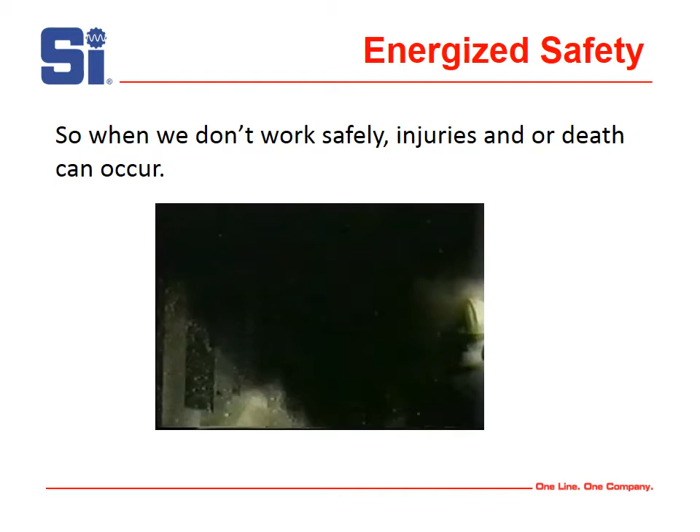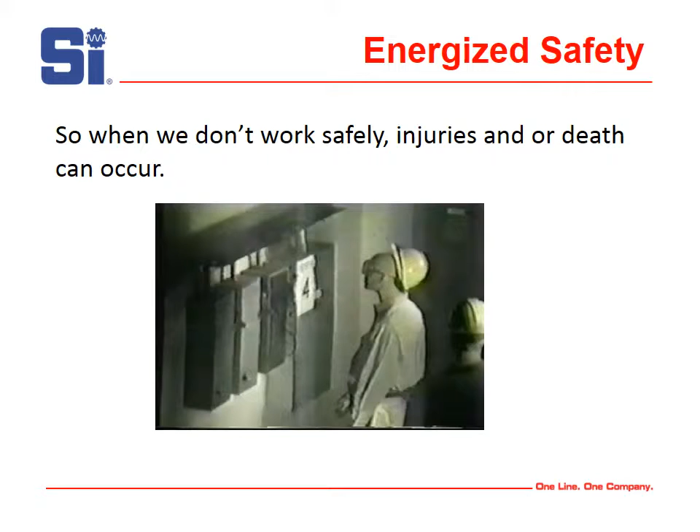Combustibles. In order for a fire or combustion to be present, you need a few things. You need a source for it to occur from, and you need a resource or chemical reaction to feed it. When these two things are present, you have the potential for devastation.

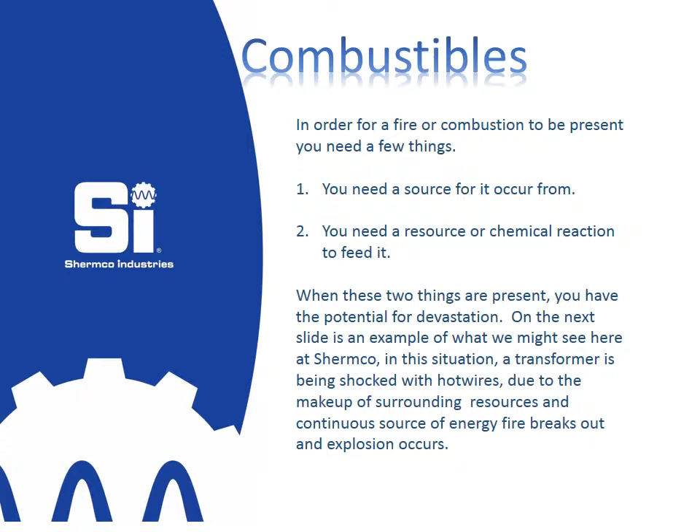On the next slide is an example of what we might see here at Shermco. In this situation, a transformer is being shocked with hot wires. Due to the makeup of surrounding resources and continuous source of energy, fire breaks out and an explosion occurs.

Combustibles continued. Here at Shermco, we have many ways that a fire can ignite from combustible means. Via OSHA regulations and constant updates to the MSDS, we can control substances and situations. The use of regulatory standards for use and storage of chemicals in the workplace is vital in our role of safety, as there are many different types of both flammable gases and chemicals on site.

Most common on site are flammable gases, such as oxygen, acetylene, and propane. Reactive ignition points also occur with welding, which uses electrical arcing to fuse metal.

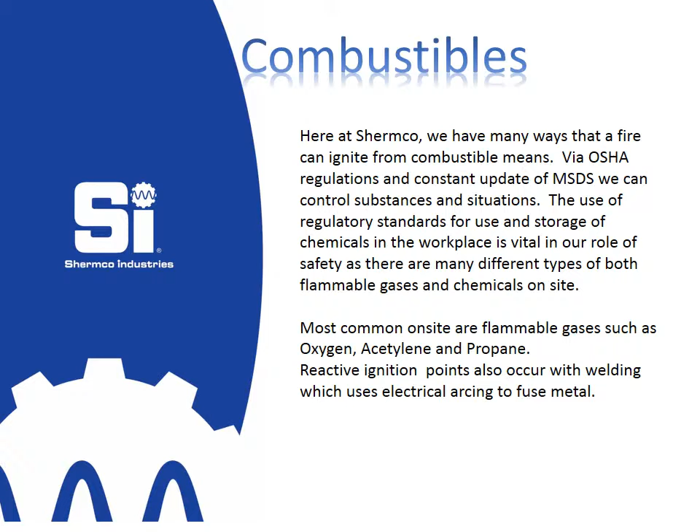Acetylene is a chemical compound with the formula C2H2. It is a hydrocarbon and the simplest alkyne. This colorless gas is widely used as a fuel and a chemical building block. It is unstable in pure form, and thus it is usually handled as a solution.

Propane is a 3-carbon alkane with molecular formula C3H8, a gas at standard temperature and pressure but compressible to a transportable liquid. Oxygen is a chemical element with the symbol O, atomic number 8. It is a member of the chalcogen group on the periodic table and is a highly reactive non-metallic element and oxidizing agent that readily forms compounds with most elements.

Welding is a fabrication or sculptural process that joins materials, usually metals or thermoplastics, by causing fusion, which is distinct from lower temperature metal joining techniques such as brazing or soldering, which do not melt the base metal. In addition to melting the base metal, a filler material is often added to the joint to form a pool of molten material, called the weld pool, that cools to form a joint that can be as strong as the base material. Pressure may also be used in conjunction with heat, or by itself, to produce a weld.

Many different energy sources can be used for welding, including gas flame, electric arc, laser, electron beam, friction, and ultrasound. While often an industrial process, welding may be performed in many different environments, including in open air, underwater, and in outer space. Welding is a hazardous undertaking, and precautions are required to avoid burns, electric shock, vision damage, inhalation of poisonous gases and fumes, and exposure to intense ultraviolet radiation.

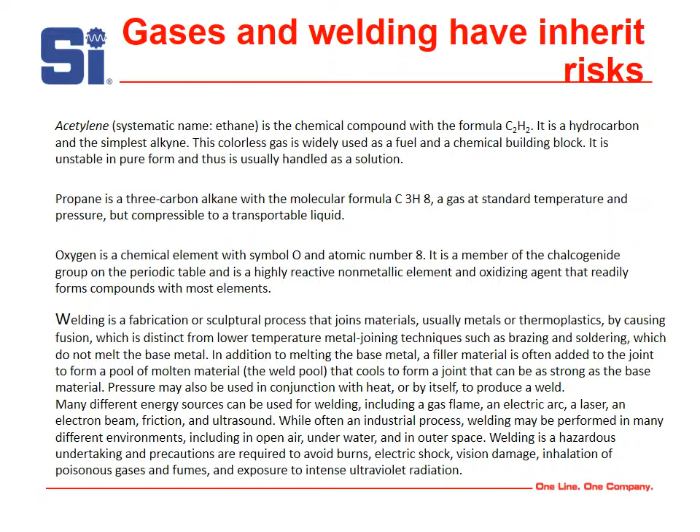Gases are regulated heavily by OSHA and covered under 1910.253(a), under the general requirements. Under A1, flammable mixtures, which is a mixture of fuel gases and air or oxygen, may be explosive and shall be guarded against. No device or attachment facilitating or permitting mixture of air or oxygen with flammable gases prior to consumption, except at the burner or in a standard torch, shall be allowed unless approved for the purpose.

Here at Shermco, we store our containers specifically to fall within the codes of OSHA Regulation 1910.253(b)(5)(ii)(a), and visibly distinguish them by color. The cylinders are always secured in upright position with a chain to eliminate accidental tipping, which might cause a break in the valve or a puncture, resulting in what could be listed as a catastrophic event.

Before a chemical, including gas, enters the facility, is used, or exits the facility, it is identified, labeled, and must pass a pre-task safety check sheet and be placed in storage, which is that of double containment. Acquisition of new chemicals and gases must be done through a formal request sheet and must be accompanied by a chain of custody log, with each owner identifying hazards found through their audits prior to its acceptance into the facility.

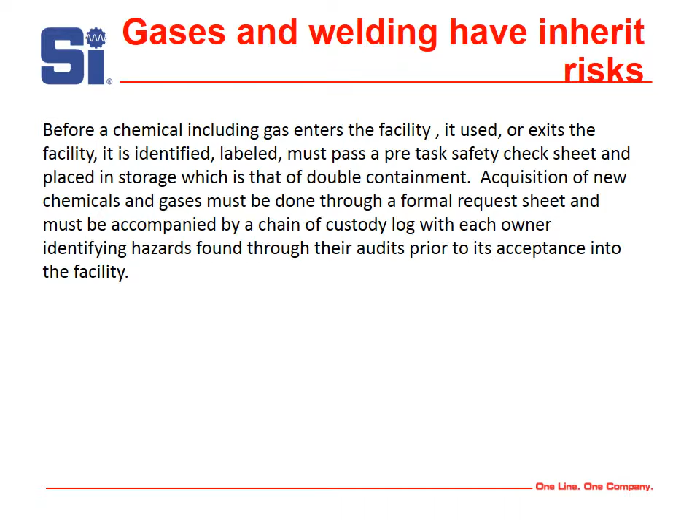Protection: there is designated PPE throughout the facility, including that which is properly fit-tested and designed for the individual using it. This protection is to ensure that safe constraints are placed on protection of eyes, hands, arms, legs, feet, body, and head.

In the event of an emergency, the company has a sprinkler system as well as fire doors to assist in containment areas. Fire extinguishers, which are also audited monthly for charge and serviceability, are available and designated for the appropriate fire in which they were manufactured.

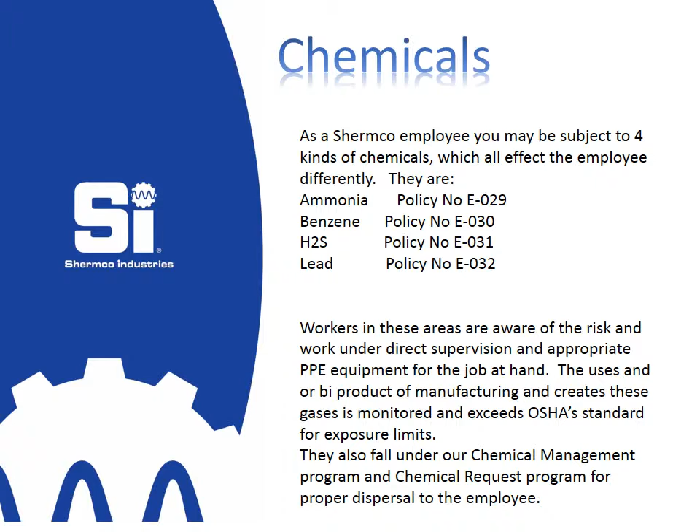Shermco's EHS policy manual conveys the necessary need and means of protecting against ammonia as part of the overall job hazard analysis. Policy: all employees who have been identified as having a predetermined risk of occupational exposure to ammonia will be provided appropriate procedural precautions, training, and PPE. The purpose is to protect employees from occupational exposure to ammonia, and the scope applies to all Shermco facilities and work sites.

Color and state: ammonia is a non-flammable, colorless gas under normal conditions. It can be liquid under pressure. It is very soluble in water, forming ammonium hydroxide.

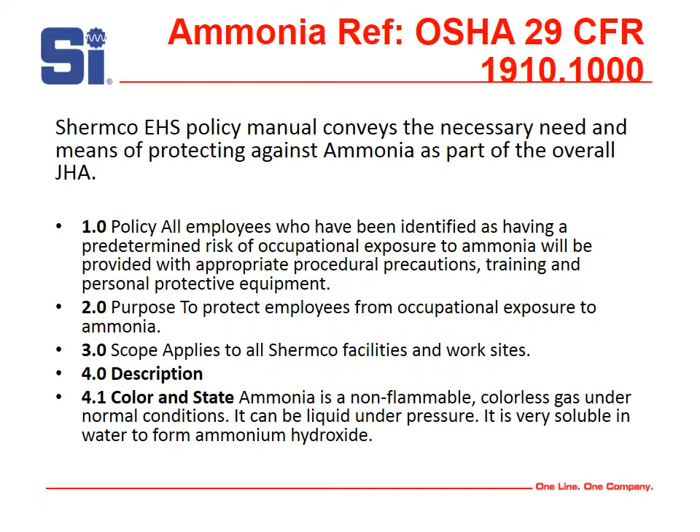Some clients at Shermco may use or produce ammonia during their operations. It is a component of products derived from coal and petroleum and is found in gasoline and other fuels. Most produced ammonia is used as a fertilizer, but anhydrous ammonia is widely used in industrial refrigeration applications and hockey rinks. Ammonia is also used in the manufacture of plastics, detergents, pesticides, and other chemicals.

Employee exposure could occur anywhere ammonia is produced or used. Ammonia is a hazardous gas that is both caustic and toxic. High concentrations of ammonia gas, liquid ammonia, or solutions of ammonia can cause harm if inhaled or if they come into contact with eyes or skin. Ammonia also has a very pungent, suffocating odor. Even at low concentrations, inhaling it or getting the solution on the skin can cause burning, fainting, or possible death. Caution should be used when handling this chemical.

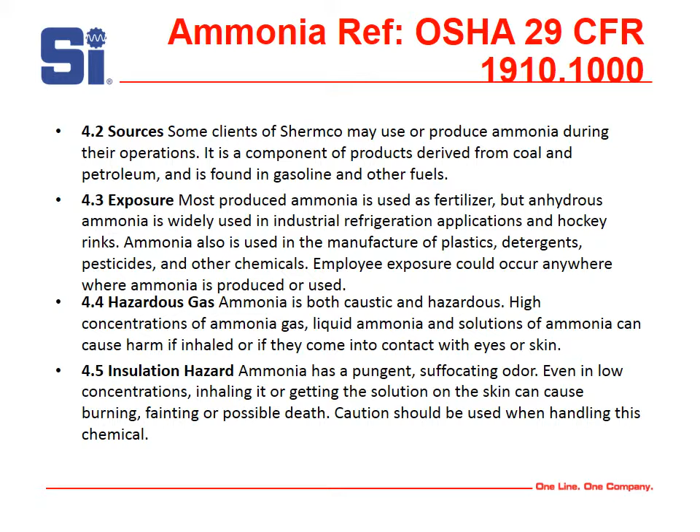High concentrations of ammonia gas, liquid ammonia, or solutions of ammonia can cause harm if inhaled or if they come into contact with eyes or skin. The Occupational Safety and Health Administration has set a 15-minute exposure limit for gaseous ammonia of 35 parts per million by volume in environmental air, and an 8-hour exposure limit of 25 parts per million by volume. The National Institute for Occupational Safety and Health recently reduced the IDLH, or immediately dangerous to life and health level, from 500 ammonia parts per million to 300 parts per million. OSHA Regulation 1910.134(b) defines IDLH as an atmosphere that poses an immediate threat to life, which would cause irreversible adverse health effects, or would impair an individual's ability to escape from a dangerous atmosphere.

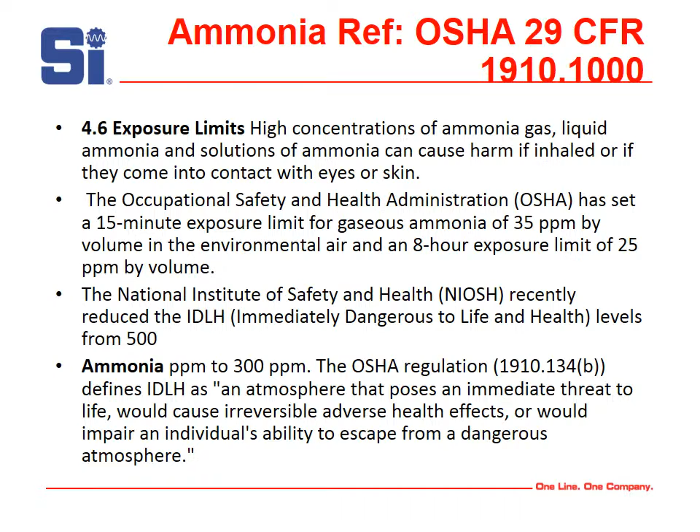Ammonia vapor has a sharp, irritating, pungent odor that acts as a warning of potentially dangerous exposure. The average odor threshold is 5 parts per million, well below the level of danger or damage. Exposure of the eyes to ammonia may cause burning, tearing, temporary blindness, or severe eye damage. Exposure of the skin to ammonia may cause severe burns and blistering. Exposure of the respiratory tract, mouth, nose, and throat to ammonia may cause runny nose, coughing, chest pain, severe breathing difficulties, severe burns, and even death.

Training: although ammonia is regulated in the United States as a non-flammable gas, it still meets the definition of a material that is toxic by inhalation. Shermco employees who work in the vicinity of ammonia will be trained to avoid exposure to the chemical. This training will include, but is not limited to, the contents of this policy, the federal OSHA standards and guidelines, proper PPE selection and use, care and inspection, and customer-required precautions related to working around ammonia.

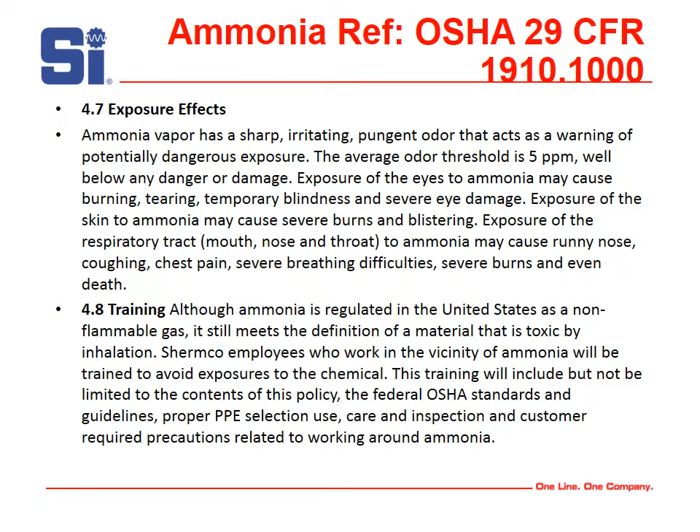Shermco employees will be provided with and required to use impervious clothing, gloves, face shields, respirators, and other appropriate protective clothing necessary to prevent any possibility of skin contact with liquid anhydrous ammonia or aqueous solutions of ammonia containing more than 10% by weight of ammonia. Similar precautions should be taken to prevent the skin from becoming frozen from contact with vessels containing liquid anhydrous ammonia.

Employees will utilize the job hazard analysis to indicate the hazard of ammonia in their vicinity and to outline any safety contingency plans and provisions to be followed. Site plan awareness: employees must be informed where ammonia is used in the host facility and be aware of all plant safety rules and emergency contingency plans that apply. Crew leaders are responsible for obtaining this information prior to work commencing and for communicating it to the crew during the morning tailgate meeting.

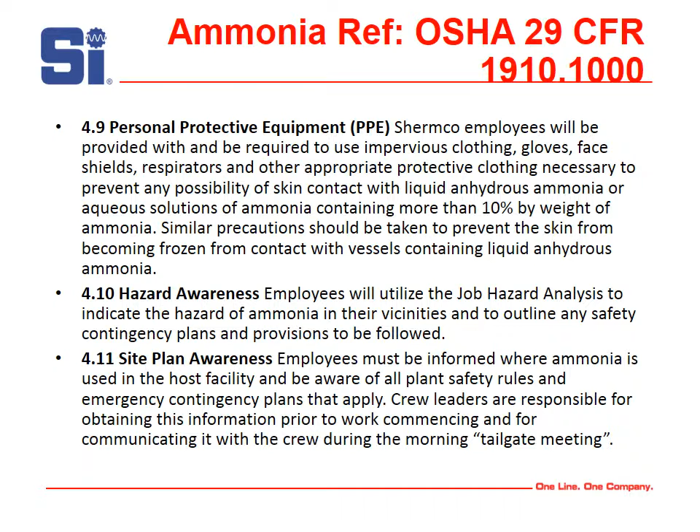Benzene. All employees who have been identified as having a predetermined risk of occupational exposure to benzene will be provided with appropriate procedural precautions, training, and personal protective equipment. Purpose is to protect employees from occupational exposure to benzene. This applies to all Shermco facilities and work sites.

Benzene is a colorless liquid with a sweet odor. It evaporates into the air quickly and dissolves slightly in water. It is highly flammable and is formed from both natural processes and human activities.

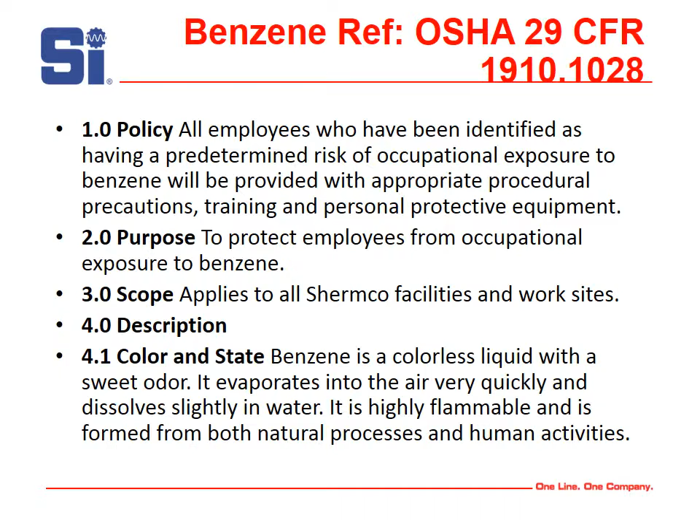Some clients at Shermco may use or produce benzene during their operations. It is a component of products derived from coal and petroleum and is found in gasoline and other fuels.

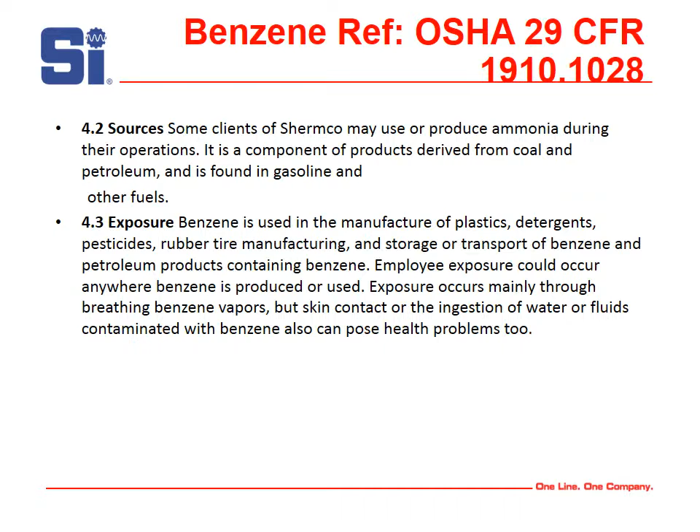Benzene is used in the manufacture of plastics, detergents, pesticides, rubber, tire manufacturing, and storage or transport of benzene and petroleum products containing benzene. Employee exposure could occur anywhere benzene is produced or used. Exposure occurs mainly through breathing benzene vapors, but skin contact or the ingestion of water or fluids contaminated with benzene also can pose health problems.

Controls. Before an employee may go to a job where they may be exposed to benzene, a schedule for development and implementation of the engineering and work practice controls will be established. Exposure to benzene is controlled by limiting evaporation and preventing splashes and spills. Where exposure may occur, the preferred controls are engineering controls such as the use of hoods, canopies, and proper ventilation, coordinated with the use of personal protective equipment.

A time period will be allowed for such engineering controls to be implemented before personnel are permitted to work in the vicinity. When engineering controls or work practices are being implemented and are not feasible, or in the event of emergency, respirators and similar personal protective equipment may be used. These plans will be reviewed and revised as appropriate based on the most recent exposure monitoring data to reflect the current status of the program as it pertains.

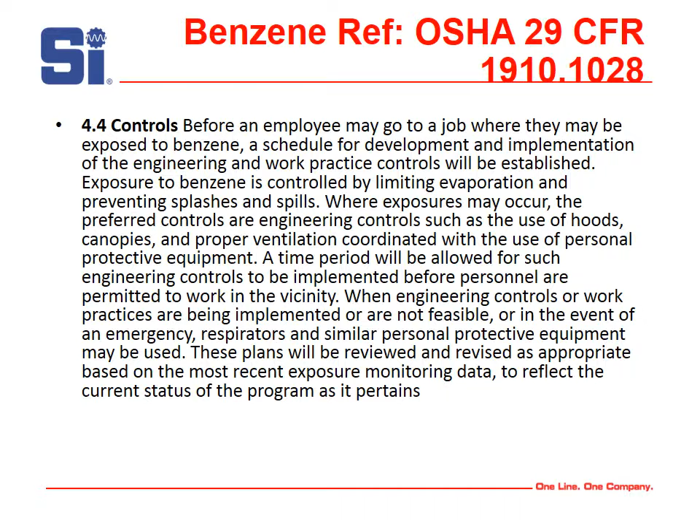Hazardous chemical. Benzene is considered a carcinogen by the U.S. Department of Health and Human Services.

Exposure limit. The Occupational Safety and Health Administration has set a 15-minute exposure limit for benzene of 1 part of benzene per million parts of air, that's 1 parts per million, as an 8-hour time-weighted average, or the short-term exposure limit of 5 parts per million for 15 minutes.

The National Institute of Safety and Health recently reduced the IDLH levels to 500 parts per million. The OSHA Regulation 1910.134(b) defines IDLH as an atmosphere that poses an immediate threat to life, would cause irreversible adverse health effects, or would impair an individual's ability to escape from a dangerous atmosphere.

When exposures are expected to be over the PEL prior to mobilizing to the work area or site, Shermco will implement our written program to reduce or eliminate employee exposure to or below the PEL by means of engineering and work practice controls.

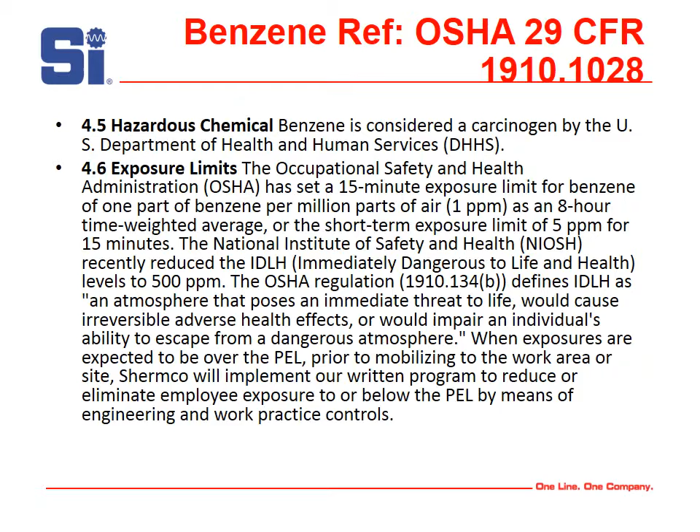Exposure effects. With exposure to benzene for less than 5 years to more than 30 years, individuals have developed and died from leukemia. Long-term exposure may affect bone marrow and blood production. Short-term exposure to high levels of benzene can cause drowsiness, dizziness, unconsciousness, and even death.

Training. Shermco employees who work in the vicinity of benzene will be provided with a written copy of this plan and trained to avoid exposure to this chemical. This training will include, but not be limited to, the contents of this policy and federal OSHA standards and guidelines, proper PPE selection and use, care and inspection, and customer required precautions related to working around benzene.

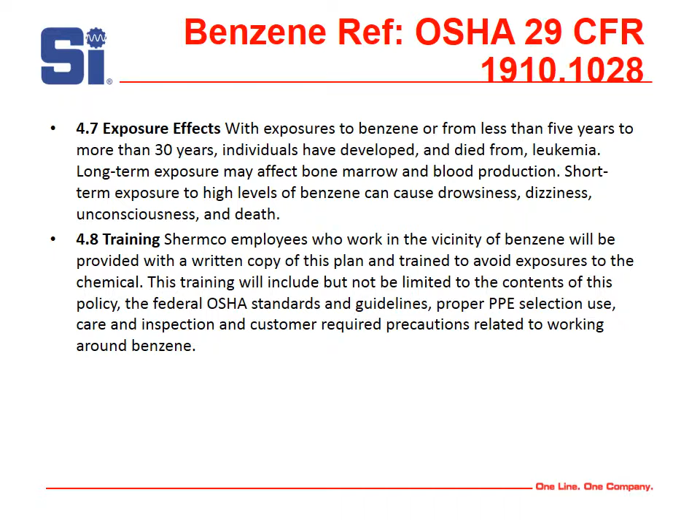Personal protective equipment. Shermco employees will be provided and required to use appropriate respirators based upon the expected airborne concentrations of benzene and/or conditions of use. Respirator use will adhere to the Respiratory Protection Policy Section E-038 in the Shermco EHS Manual, which adheres to OSHA 29 CFR 1910.134. All respirators utilized for benzene protection will be NIOSH approved.

Where respiratory protection is not required but benzene exposure could occur due to accidental release, an organic vapor gas mask or a self-contained breathing apparatus with a full face piece will be provided for use during escape. Personal protective clothing and equipment, i.e. chemical goggles, poly-coated Tyvek suits, etc., will be worn where appropriate to prevent eye contact and limit dermal exposure to liquid benzene. Protective clothing and equipment will be provided by Shermco at no cost to the employee.

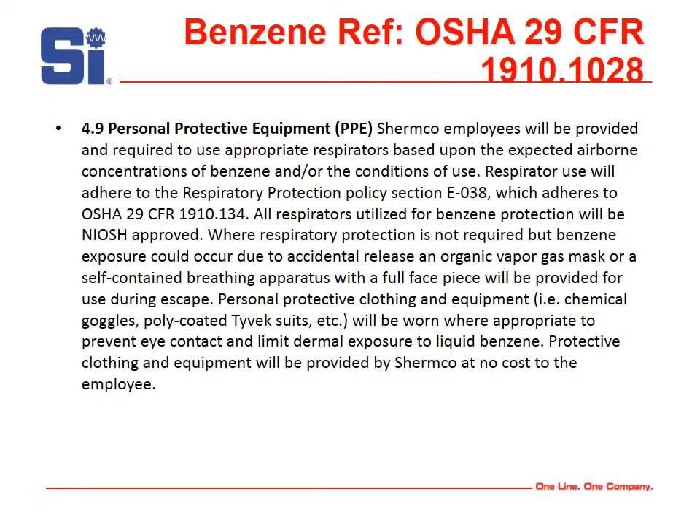Hazard awareness. Employees will utilize job hazard analysis to indicate the hazard of benzene in their vicinities and to outline any safety contingency plans and provisions to be followed.

Site plan awareness. Employees must be informed where benzene is used in the host facility and be aware of all plant safety rules and emergency contingency plans that apply. Crew leaders are responsible for obtaining this information prior to work commencing and for communicating it with crews during the morning tailgate meeting.

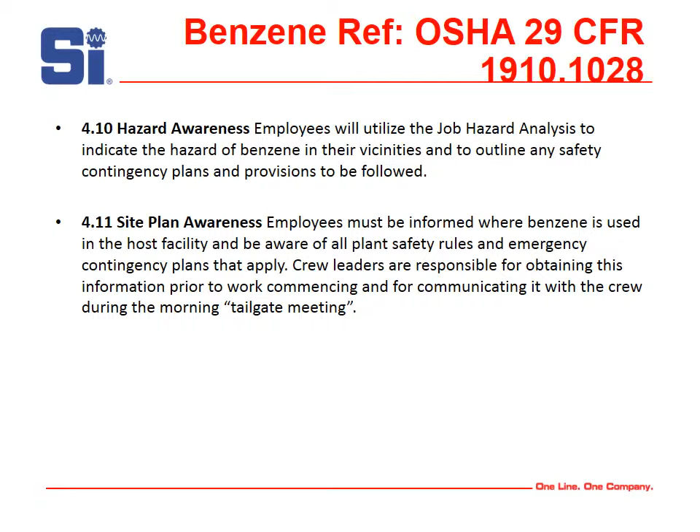Another physical hazard here at Shermco is that of heat and cold. The physical hazards associated with variable temperatures of heat and cold can be a vital part of our environment.

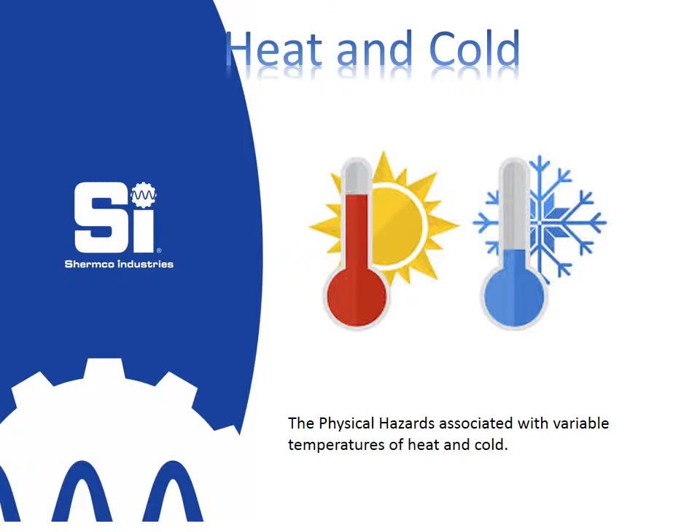Working in a hot environment can have effects on the body, some of them severe enough to cause injury. Shermco provides persons working in such conditions breathable wear that absorbs sweat in an effort to keep the employee cool.

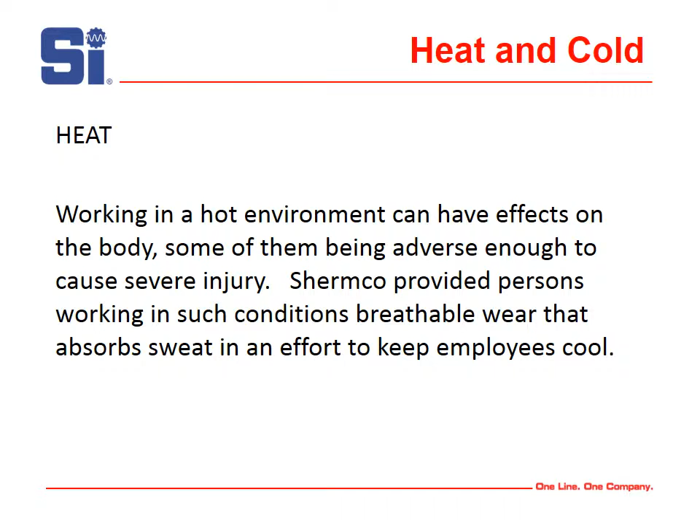The shop is equipped with 7 rolling bays. During summer hours, these doors are open to allow ventilation, as it's not feasible to run an AC system throughout the entire facility without the need of monitoring air quality. The use of industrial fans helps circulate the air throughout the shop floor.

During the winter, the shop gets cold, and overhead heaters are provided to eliminate cold exposure indoors.

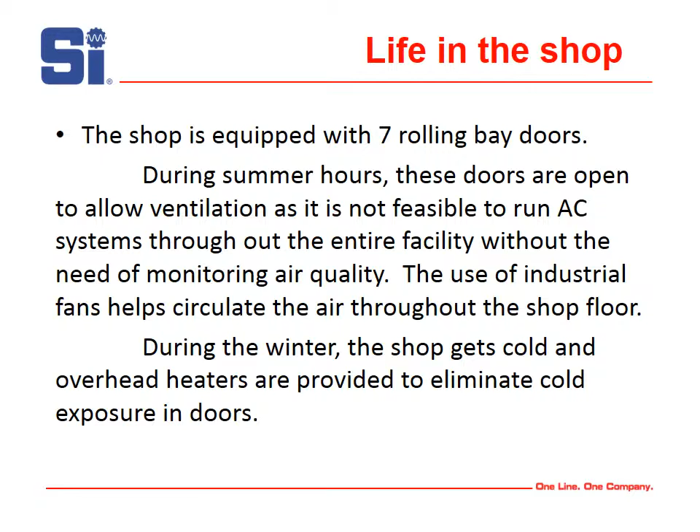Field workers are rarely outside due to sophisticated computer equipment that monitors power and subsystems. When they are, however, they are dressed appropriately for the work at hand within regulations and company policy. Life in the field is oftentimes less adverse than that in the shop in this manner.

All employees are encouraged to take regular breaks and micro breaks to minimize exposure to any one element. Employees are also provided a regulated break room with refreshments free of charge to promote an environment where they feel taken care of. Oftentimes, promotion of morale can be the difference between focused production and mistake-prone production that induces an incident.

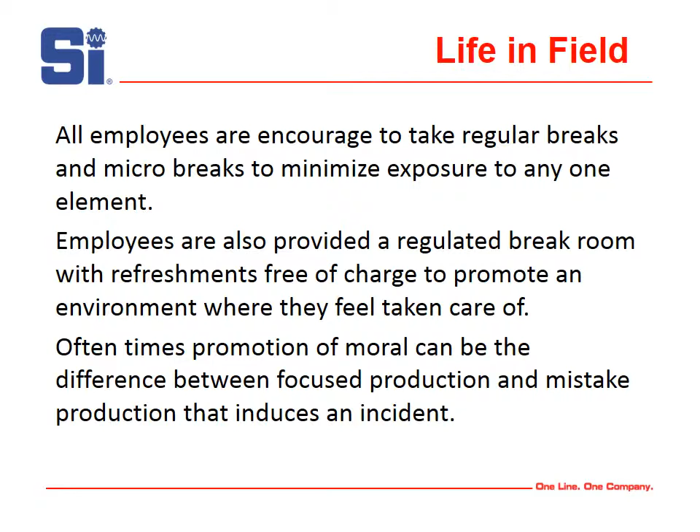Confined space. Shermco has procedures for confined space, however rarely is it considered to be subterranean. A prime example would be working in a wind turbine room some 200 feet in the air. Oftentimes, techs will work independently to ensure the maximum amount of room to maneuver and prevent accidents from just being crowded. There are times we also use aerial lifts and cages to access or move equipment.

The physical hazards in confined spaces are numerous. Proper PPE, such as a hard hat, restraints, or harnesses, are always available to our technicians and audited weekly as part of our safety management program.

Shermco Incident Outlook. For the last 2 years at Shermco, there have been only two types of accidents reported. Electrical shock is the first one. As safe as we are, it's always back to basics when dealing with electrical equipment.

This is the point in the process of procedures. No matter how smart we are, we're always prone to incidents which could result in physical harm, property damage, and often both.

Procedures are in place for step-by-step application to avoid such situations from happening. The majority of these incidents are deemed preventable if procedures were followed. To diminish these issues before they happen, we utilize trainings and JHA as well as self-audits when completing a task. Our techs literally call in to their supervisor between steps for job status update and a knowledge check prior to continuing work.